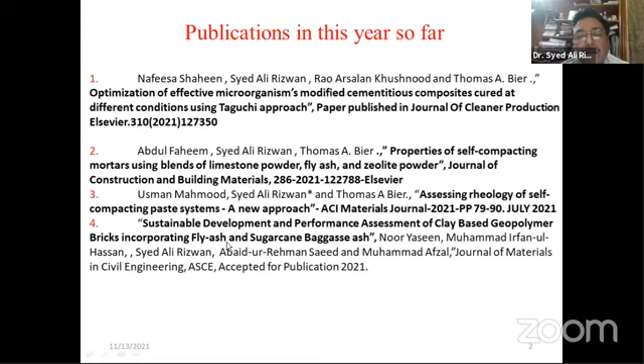And the 4th paper that is under publication stage is Sustainable Development and Performance Assessment of Clay-Based Geopolymer Bricks incorporating fly ash and sugarcane bagasse ash, because these are waste materials and we have to find their value-added use.

So what is a self-consolidating concrete? This is the task assigned to ACI 237, and I am a member of that. ACI 237 defines self-consolidating concrete as highly flowable, non-segregating concrete that can spread into place, fill the formwork, and encapsulate the reinforcement without any mechanical consolidation.

So from the definition, it should be clear: it is highly flowable, so in the fresh state it acts like a fluid, and the laws of fluid mechanics are available. Then in the transition, when the skeleton within the concrete forms, it is somewhat solid and somewhat fluid. And then after, in the hardening stage, it gets hardened and obeys the laws of solid mechanics.

As you can see, self-consolidating concrete does not require any mechanical vibration, which is normally done with conventional concrete. What are the applications? Self-consolidated concrete is generally applied in situations where either mechanical vibration is not possible or it is uneconomical. The situations include tunnels, long span modern bridges, rafts, columns of high-rise buildings, pre-stressed concrete structures, and transportation structures.

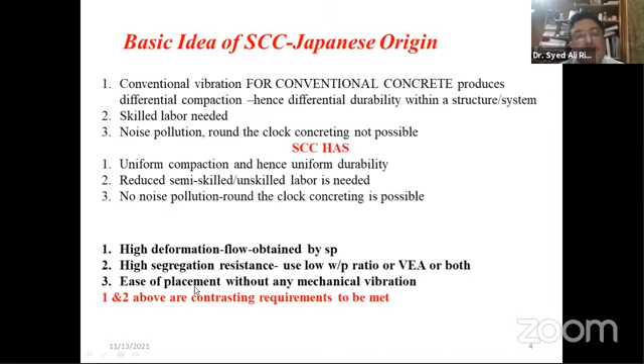Now, in Pakistan, what is the current practice? This should be the question, and this is the main idea of informing young engineers why self-consolidating concrete is not being applied. You must remember that first the architectural drawings are made, then structural drawings, and only if the specification states that the concrete used will be self-consolidating concrete is it bound for the contractor to use SCC.

At the moment, there are very limited structural engineers who specify SCC. Some may not know its advantages, or some may just ignore it because it has slightly higher cost, since we need mineral and chemical admixtures. Chemical admixtures are imported from abroad. Mineral admixtures like fly ash are now available in Pakistan due to thermal power plants. I hope chemical admixtures will also become available, and then we will be very good at making self-consolidating concrete.

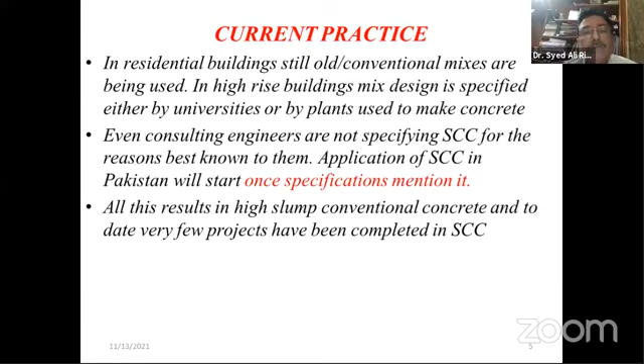In all concrete works, it is very important to calculate the water demand of concrete, whether it is conventional concrete or self-consolidating concrete, because if you know the water demand, your mixing water will be very close to it.

Now, you know that in concrete there is a powder phase. Any material less than 125 microns in size is called powder. So cement plus fly ash or silica fume or whatever are called powders. Their water demand can be determined simply by using a Vicat apparatus.

This is an experiment you do in your third year of civil engineering, calculation of water demand of cement. Then you can calculate the water demand of the fine and coarse aggregates. It is generally believed that the water demand of the paste system is around 92 to 93% of the total concrete, so you can multiply that by 1.07 or whatever to know the total water demand in kilograms per meter cube. So you can select an appropriate water cement ratio or water cementitious material ratio so that the water demand and the mixing water content are almost equal.

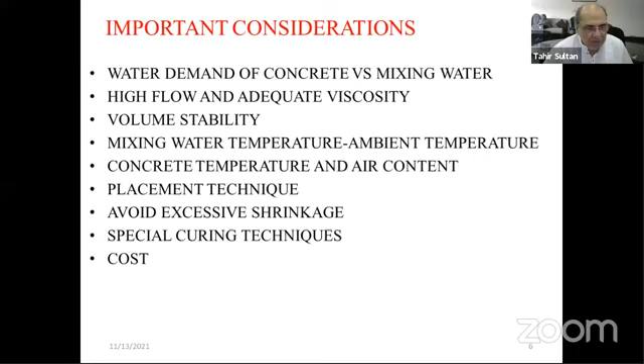One question has been asked late but it's related to vibration, from Ziaullah: he has seen in literature that a vibration of about 20 to 40 seconds is required for compaction. He's asking, will 20 to 40 seconds of vibration cause segregation?

20 to 40 seconds of vibration is too much; it should not be done. Segregation will take place only if the viscosity is low, but if the viscosity is high enough, segregation is not likely to take place. Ultimately, due to sedimentation, all the phases will occupy their positions. In conventional concrete systems, the mixing time in Germany is around 2 minutes, and for special concretes like SCC, we can have 3 to 3.5 minutes on the plant, where you can discharge all the chemical and mineral admixtures in the same drum, and there is a lot of shear rate.

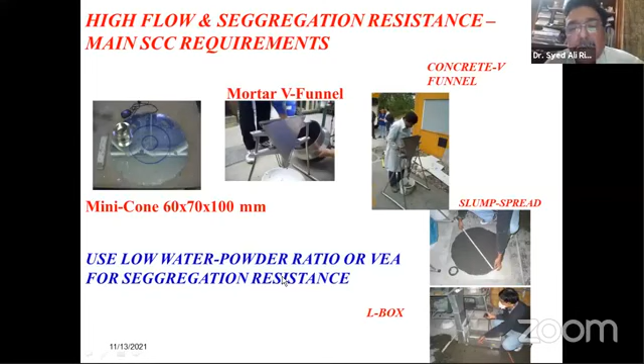Dr. Saab, please continue. There are no questions so far. Okay.

Now, as I have mentioned, in conventional concrete the Japanese think, and I endorse, that there is a differential compaction and hence differential durability. In SCC, we have got uniform compaction and hence uniform durability.

So this is environmentally friendly concrete, with no noise pollution. Binders, powders, sands, chemical and mineral admixtures are important. The only thing we should look for is that in case of coarse aggregates, the size and the content of coarse aggregate is slightly dropped.

Because when this SCC flows, there is internal friction between different phases. And if there is more internal friction, it will take more time to flow, and hence it will not be an SCC. Therefore, we choose a slightly low coarse aggregate content, and its size in actual practice can be limited to around 16 millimeters or so.

In the conventional concrete system, if you are doing residential buildings, these days engineers prefer to have a half-inch down concrete. But when I was a student at UET Lahore, our teachers like Professor Khilji and others used to tell us that the maximum coarse aggregate size should be as large as possible. Even they recommended 1 inch and 1.5 inch.

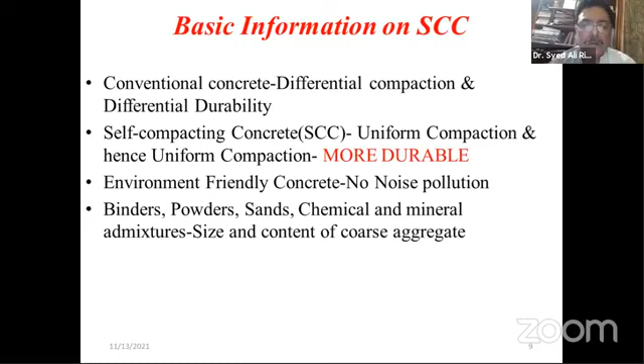Then I will try to show you some videos. I'm not sure why these...

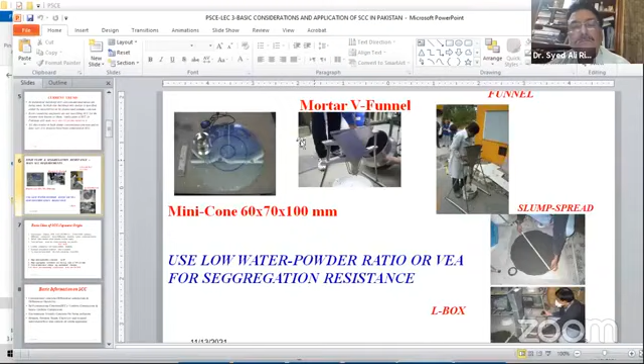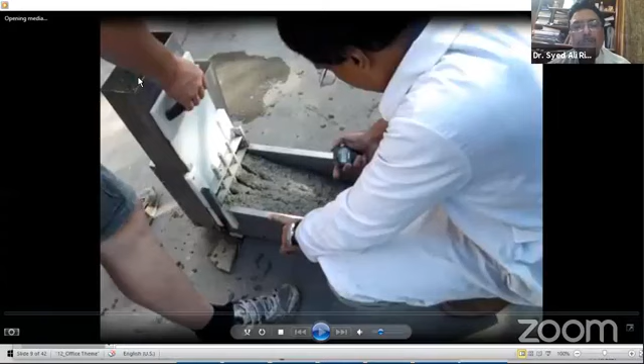This is the L box. You can see these reinforcements and concrete is flowing. So we determine the 20 centimeter, 40 centimeter, and 60 centimeter time.

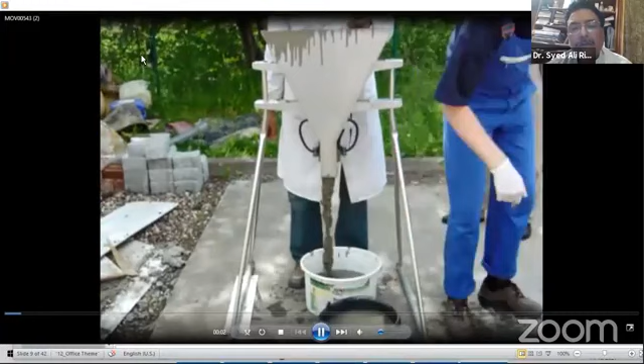And this is the V funnel test. You note down the time to empty the V funnel.

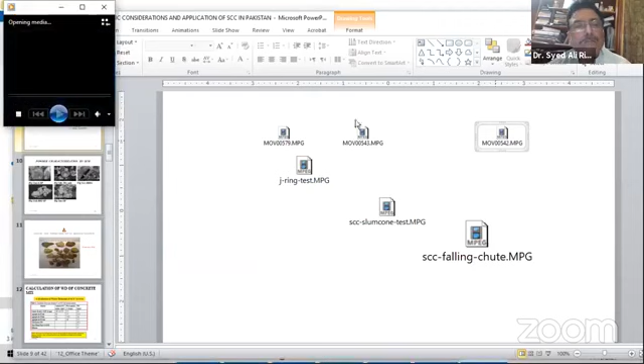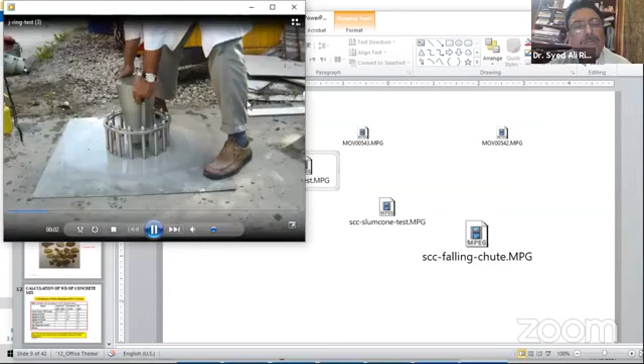Now this is the J-ring test. And these reinforcements simulate the obstruction to the flow.

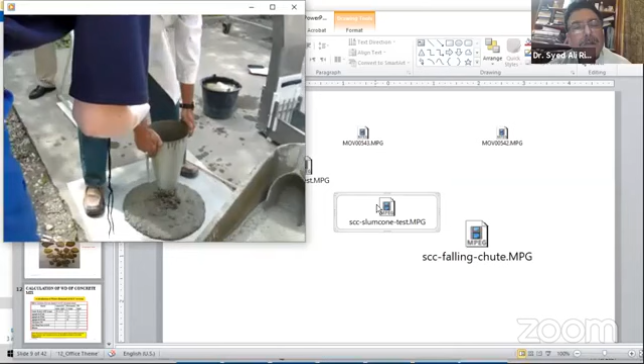Ordinary slump cone. Now all these will indicate that there was adequate viscosity. Otherwise, some coarse aggregate would have gone apart.

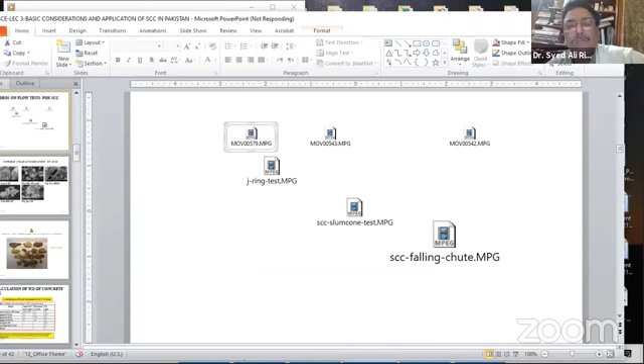Then in this picture, you can see some of the powders which can be used in Pakistan. In Pakistan, we have these crushers available near Margalla stone, and the dust of that is called limestone powder. I have labeled it as LSP. Then fly ash is also available due to these thermal power plants.

You can also use rice husk ash if it is amorphous, and you can also use silica fume as the powder. These are the mineral admixtures. They improve the microstructure of concrete.

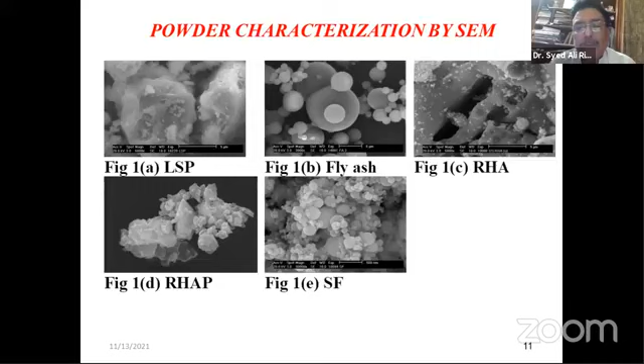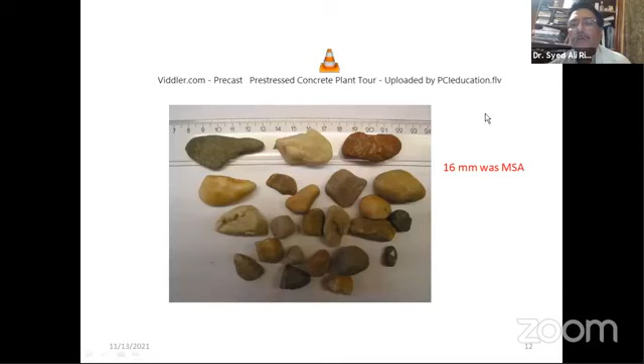Now, I wanted to show you that in pre-stressed concrete structures, you can use SCC.

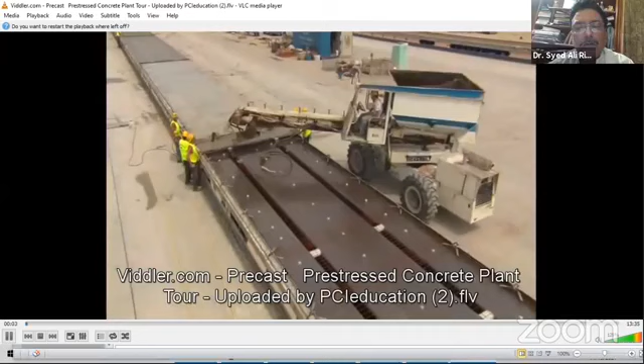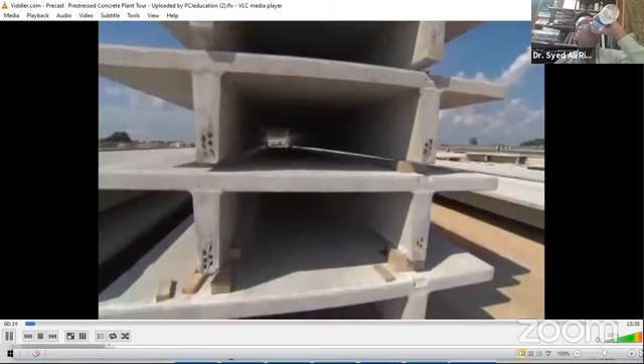This video will explain the entire process of using pre-stressed concrete in a pre-stressing plant. In this case, a double T. A double T is used primarily for parking structures, but can be used in virtually any type of building, including office buildings, industrial buildings, and schools, to name a few.

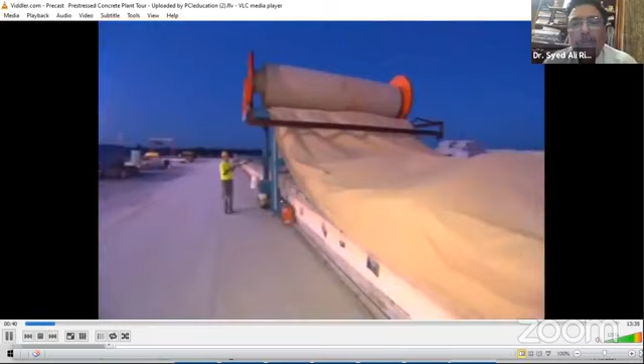For any pre-stressing plant, it is very important to maintain a clean site, not only from an image standpoint, but also from a safety standpoint, since any debris left over from the day before could create safety problems. The first part of the process is setting up the forms.

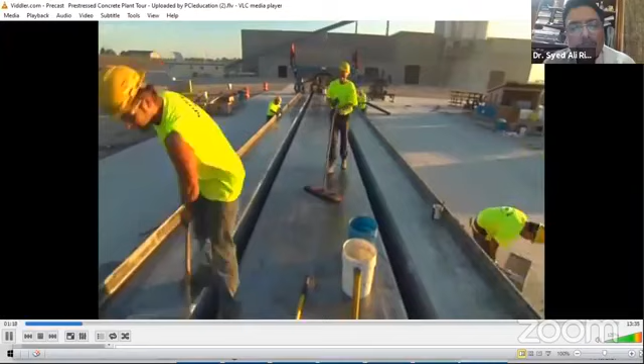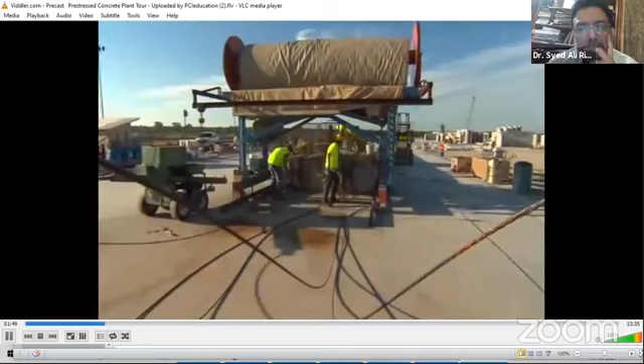This particular bed is set up for 5 double T's, each about 60 feet long. The bed has a total length of 400 feet. This is a self-stressing form, where the form itself is designed to take the total pre-stress force in compression, and also to handle the eccentricity of the strands.

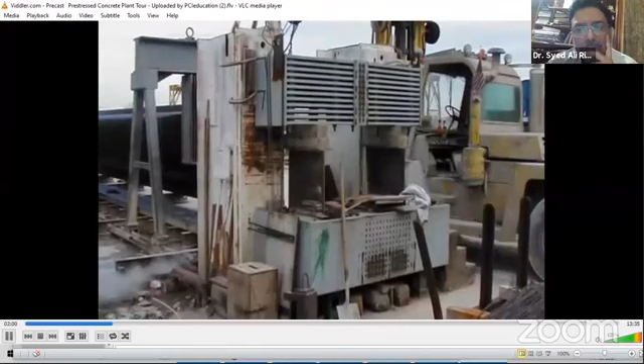Sometimes the producer makes a form that is set between both ends that are built right into the ground. The pre-stress force is then resisted entirely by both ends.

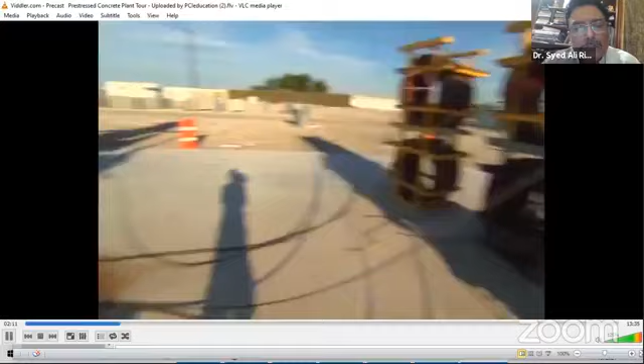Next, the strands are placed in the form and extended from end to end. They run through each of the dividers, and then through the stressing plates at each end. The typical spacing of the strands is approximately 2 inches.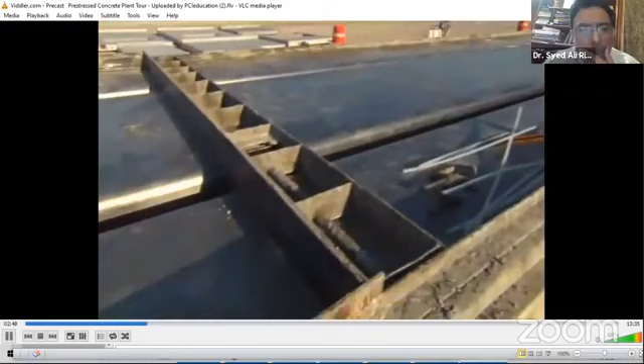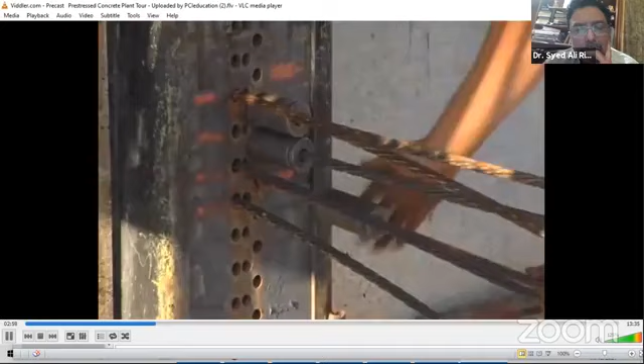The next step is the tensioning of the strands. In this case, we have straight strands, 6 strands at each stem, as shown here. The strands are first tensioned to about 2 to 5 kips based on the gauge pressure reading.

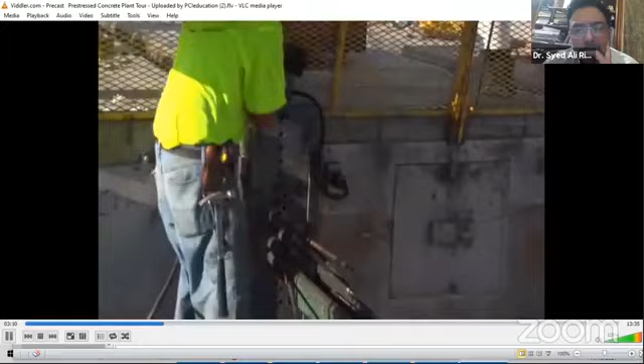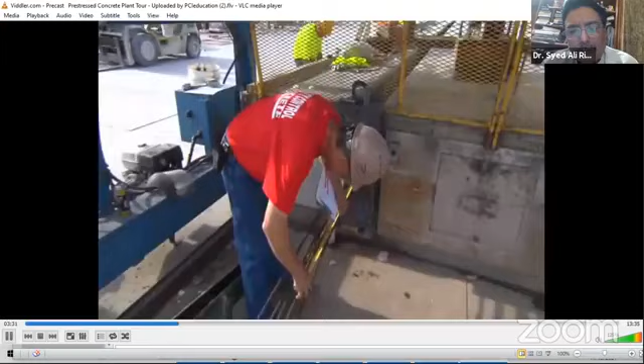A mark is made on the strand after the preload is applied. The strand is then tensioned to the specified level and measured using gauge pressure on the hydraulic pump. The QC technician then checks the elongation against the theoretical elongation. The requirement is that the force on the gauge and the elongation must match within 5%. If that tolerance is not achieved, the reason must be established and the strand may need detensioning and retensioning.

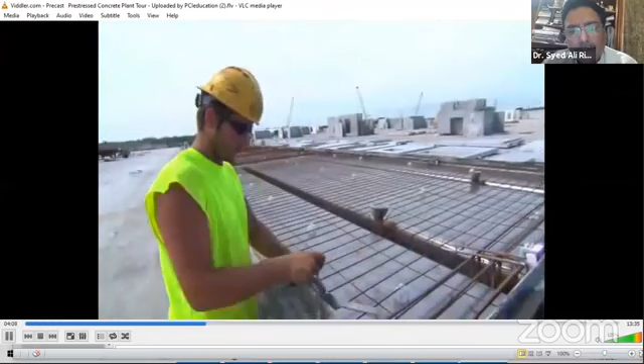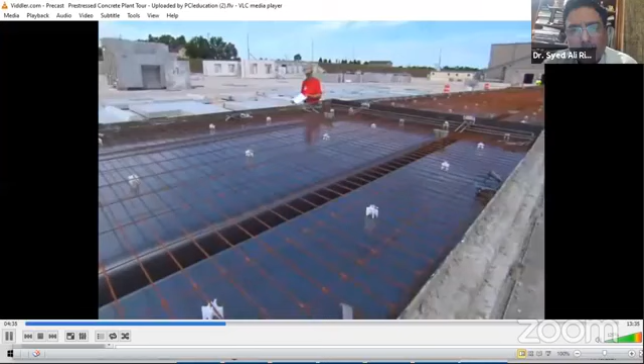The form is now ready to have concrete, but only after a pre-pour quality control check is made and the QC person signs it. This QC check can also be done by the bed superintendent, depending on the particular plant's practices. The check is critical to ensure and produce the highest quality.

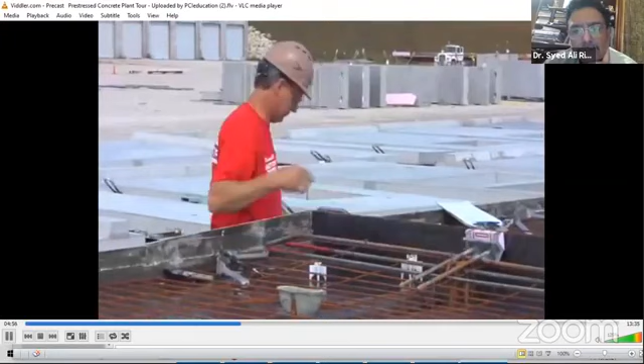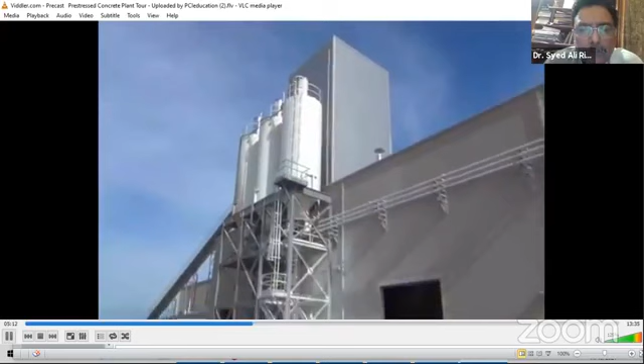Concrete is mixed in the batch plant under tightly controlled conditions. The cement is supplied using tanker trucks. Here the cement is flowed from the tanker through piping to the cement silo.

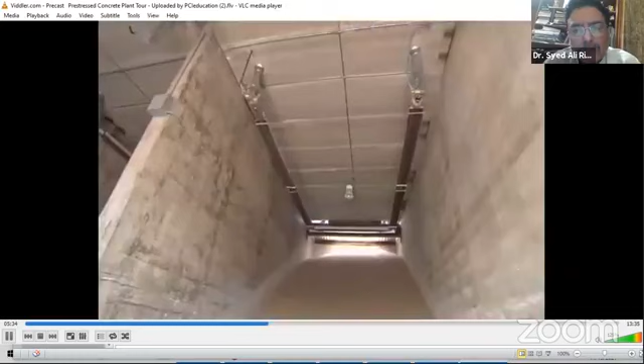When needed, aggregates are delivered to bins in the batch plant. The aggregates are stored outside of the batch plant in separate bins. In this case, an enclosed vertical bin system is utilized. During winter, in northern climates, the aggregates must be heated properly through the batching system to maintain proper concrete mix temperatures.

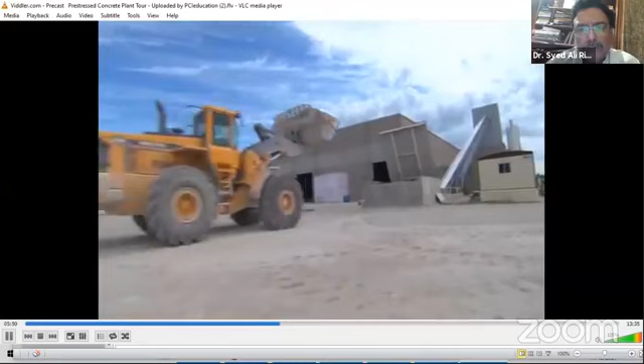Augers are used to move material and protect the flow. Computers are used to proportion the mix. Cement, sand, stone, water, and admixtures are measured according to signals from the computer.

After the concrete is discharged into a delivery device, it's imperative that the concrete mix be delivered to the form as soon as possible. These vehicles are called buckets, and they are used to deliver the concrete to the bed.

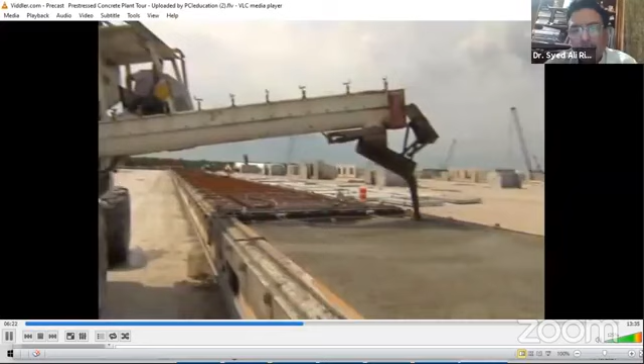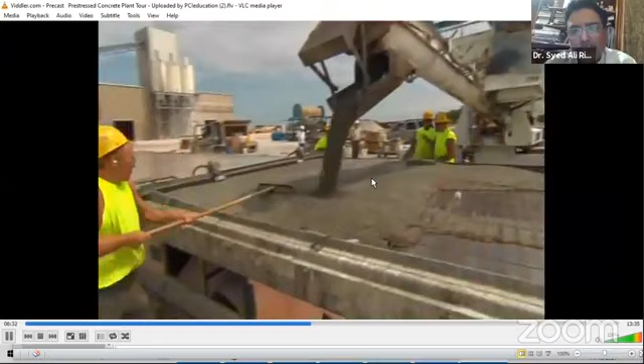A self-consolidating concrete is being used to cast these particular double T's. With this type of concrete, vibration is not required to consolidate the concrete. However, lightly controlled vibration is used in the double T stems to help it flow from the side.

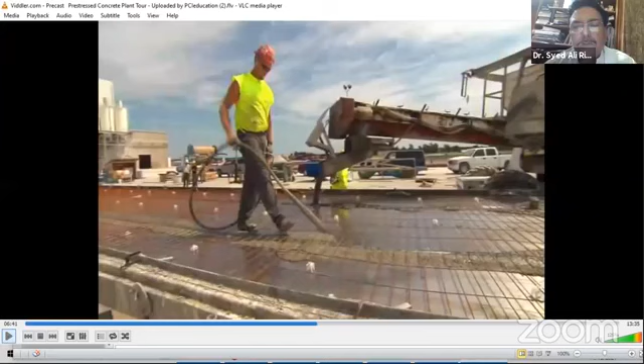So you have seen that the stem was slightly vibrated because in double T's it matters, but the vibration time was just a few seconds, not 20 or 40 seconds.

In the SCC plant, I had a chance to work in a team of professionals in Germany, where we had to make concreting at 150 meters down the ground surface, and the horizontal distance was also around 300 meters.

The pumper used was from Putzmeister, the best pumper in Germany. Natural aggregates were used, with a maximum size of 16 millimeters, but some aggregates went up to 5 centimeters long since they could pass through the minimum dimensions. If you get more of these particles, the chances of blockage are quite high. So you should be careful about the paste content, because paste is the vehicle for transport of the aggregate phase. You have to examine the shape and size of the coarse aggregate.

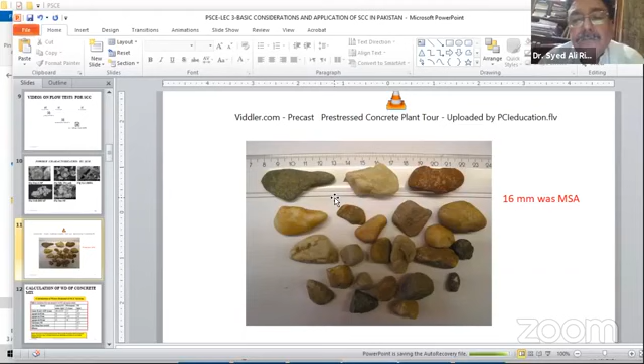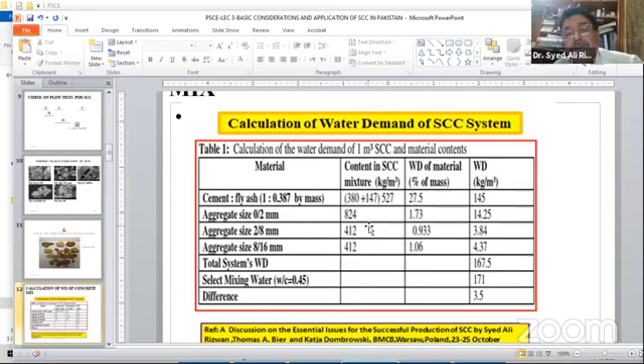You can get your questions noted if there is a question on this slide. This paper was published in BMC8 Warsaw, Poland, on page 152. The reference is given.

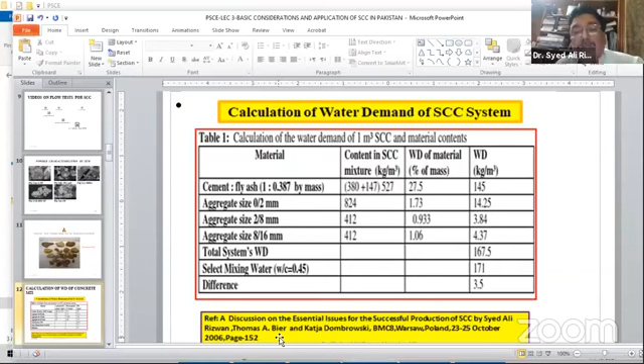Then this is a very beautiful slide, which gives the packing concepts in high performance concrete or self-consolidating concrete systems. This has been taken from a journal, probably by Professor H.J.H. Brouwer from Eindhoven University of Technology. You see on this there is the void fraction - if it is 0.4, you can call it 40%. And here is the percentage of coarse sand to coarse aggregate.

Inside the void, there can be either air or water. In a modern concrete system, we want to pack the concrete system as far as possible. That is why we are having problems like shrinkage and other things. These were not problems with lean concretes because they had very high void ratios and very high internal cushions. So if modern concretes are used, they give some advantages, but you should be well aware that you can be in trouble if you do not know how to handle them properly.

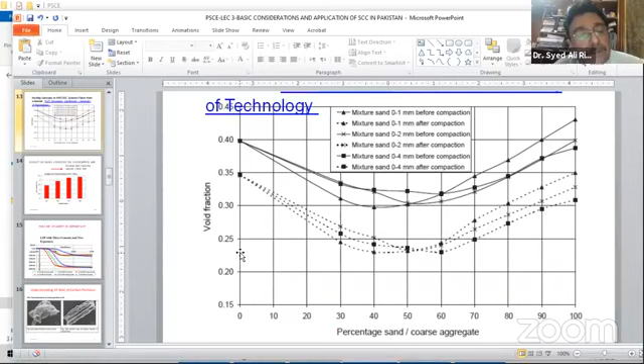I think more work can be done to improve these using our Pakistani sands and coarse aggregates, because after the construction of dams, according to the Indus Basin Treaty, the water coming downstream is actually sediment free or has very low or light sediment size. The result is that the fineness modulus of sand has been dropping over the years. Now the highest fineness modulus of sand is from River Haro at site Kibla Bandi, which has a fineness modulus of around 2.2. But we all know that in order to make high strength concrete, we need sand with a fineness modulus of around 3. So we need to mix in coarser fractions in order to make high strength SCC or high strength conventional concrete. If you have any question, please get it noted with Tahir Sultan.

Then in this slide, which looks very beautiful, on the vertical axis there is the air content.

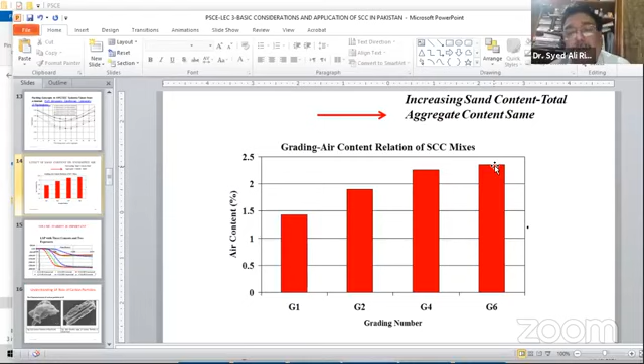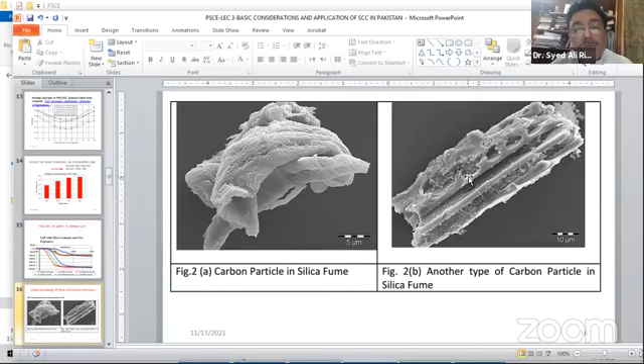Next slide: I was testing a self-consolidating mortar, and this is the aggregate under scanning electron microscopy, magnified 300 times. This is the matrix, and you can see a very well-defined ITZ—the zone which separates the aggregate from the cement paste.

These days we are busy making arrangements on how to make this ITZ very strong, because it is the weakest link in reinforced concrete structures. That's why we use a lower size aggregate, to keep this ITZ as small as possible. There are other ways also.

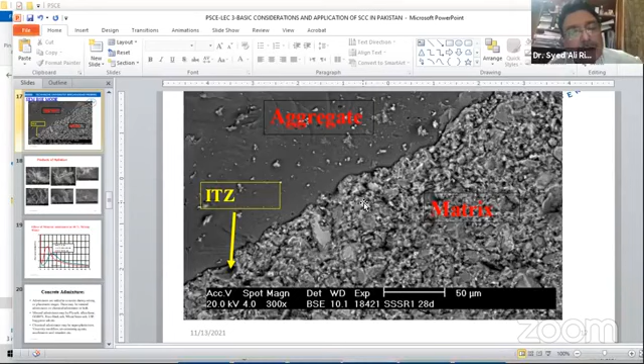All civil engineers know these are the hydration products—very well defined, hexagonal, beautiful calcium hydroxide crystals, and these are the ettringites. The shape, morphology, and sizes change due to some constituents. We study the microstructure, assuming that the properties at the microstructure level will explain the results at the macro level.

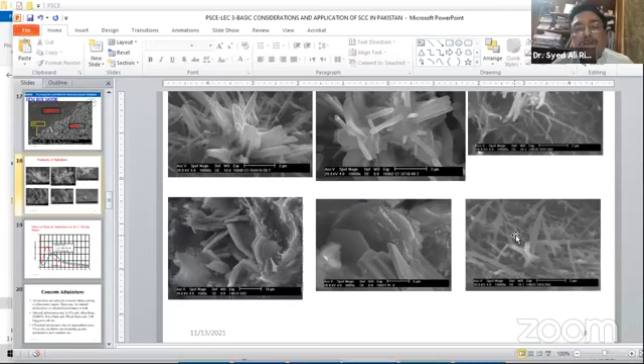Now this is the calorimetry curve, in which I have just tried to use...

The first question is again from Engineer Haziq Zahir: are there any detrimental effects of using silica fume? Literature usually suggests using 10% of the quantity of cement in the mix. The second related question: what about heat of hydration relatable to SCC? Also, when we use pozzolanic cementitious materials with SCC, do they act as retarders too, since there seems to be a delay in setting time?

Silica fume is a kind of accelerator. If you see the present investigation, you will find Haziq is right. According to my experience and testing, the maximum quantity of silica fume, rice husk ash, or fly ash that should be substituted for cement is around 10 to 15%. For silica fume, 10% seems to be a reasonably good value. So all pozzolanic materials are in fact accelerators—they increase the heat of hydration and the rate of hydration reaction.

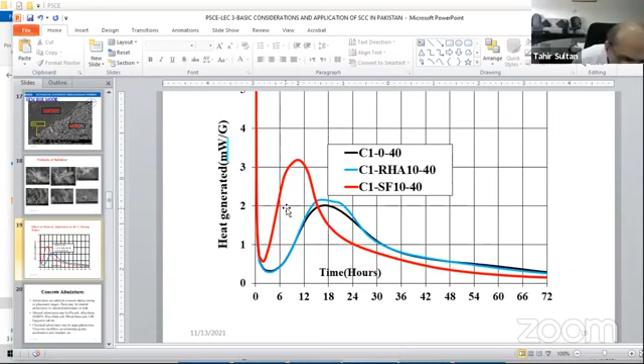Admixtures are added to concrete during mixing or placement. These may be mineral admixtures or chemical admixtures, or we use both. Mineral admixtures may be fly ash, silica fume, ground granulated blast furnace slag, rice husk ash, wheat straw ash, limestone powder, and bagasse ash. If you go through this list, I think we can use some of them.

I have supervised MSc theses on all these supplementary cementitious materials, and now I plan to write a book on the local supplementary cementitious materials which can be used in high strength, high quality concrete.

Then chemical admixtures can be superplasticizers, viscosity modifiers, air entraining agents, accelerators, retarders, etc.

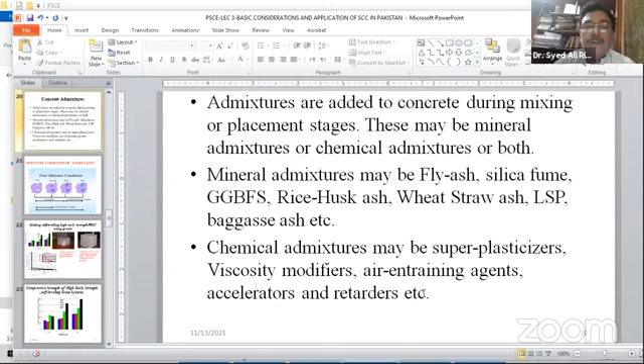He is asking, sir, when we use these pozzolanic materials, initial or early strength is high, but later ultimate strength is less than other. Not necessarily. When the first peak comes, he is right that the later strength may be slightly less, but he's referring to this graph showing initially high early strength. That doesn't mean that after 72 hours this pozzolanic material will die out. Silica fume will produce a third peak, and that will be higher than that. So this will continue.

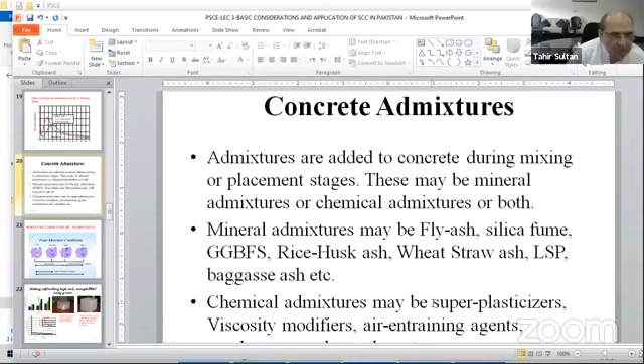Oven dry coarse aggregates will take water from the mix to complete its dryness. Even air dry aggregate will also suck in some of the water from the mix. If you use coarse aggregates in SSD condition, they will not contribute any water to the mix, nor require any water from the mix. In wet conditions, the aggregates will give away some water to the mix. So we should be very particular - if the aggregate is wet, there is a method to approximately calculate how much is the wet water, or how much more water there is than SSD conditions, so you can reduce that much mixing water.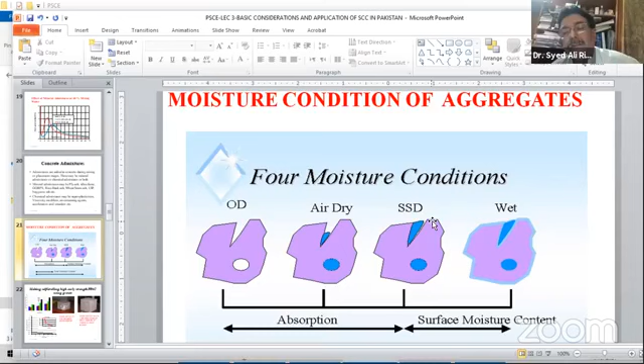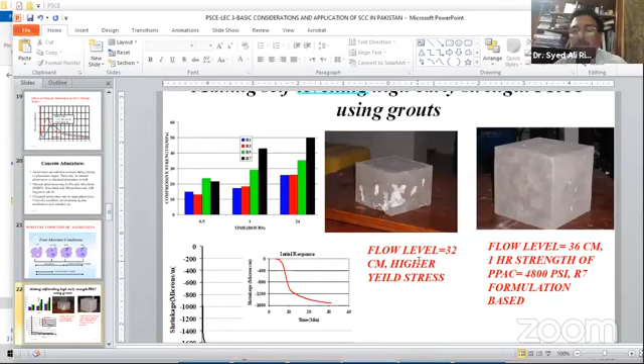I was also interested in making very high early strength cementitious materials. For example, if there's a motorway with some damage, we cannot close it for 28 days. So we should devise a technique to restore traffic as soon as possible. In this case, I tried to restore traffic in 30 minutes, achieving a strength of 4,800 psi in about 1 hour, which gave a complete bond with the rest of the damaged structure and a very nice finish.

Self-leveling grout systems can be used to make these kinds of repairs. But there's one thing: initially they give a lot of shrinkage. So in the recipe, you should have something that acts against shrinkage. You can use something which encourages the growth of ettringite or calcium hydroxide, or use chemical admixtures for arresting or compensating the shrinkage. So it's possible to repair these strategic structures in a very low time, according to the client's requirements.

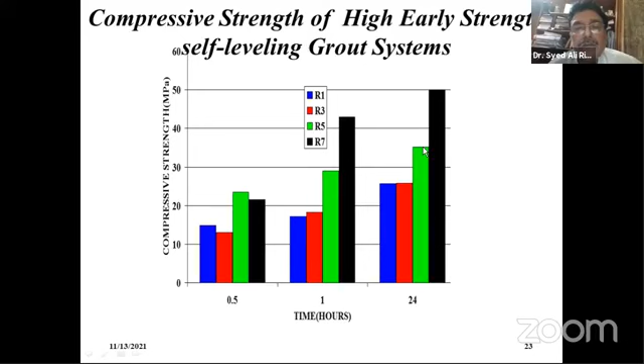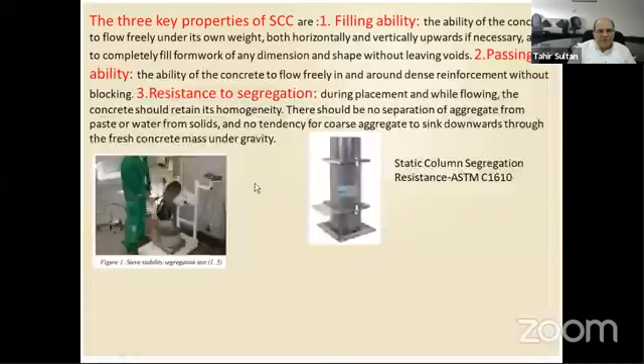Resistance to segregation can be determined by sieve stability segregation test apparatus, or a static column segregation test. In that static column, you make a column of a given height, fill it with the SCC, then after 24 hours or 2-3 days you remove it. You compare length and weight, then cut it into 3 pieces. If the density of all 3 pieces is the same, it means the coarse aggregates are evenly distributed at the top and bottom, and there is no segregation.

This is a very simple, visually acceptable test. You can see that coarse aggregates are available at the top as well as at the bottom. To confirm it, divide it into 3 portions, weigh the 3 portions, and if the weights are the same, it means there is no segregation.

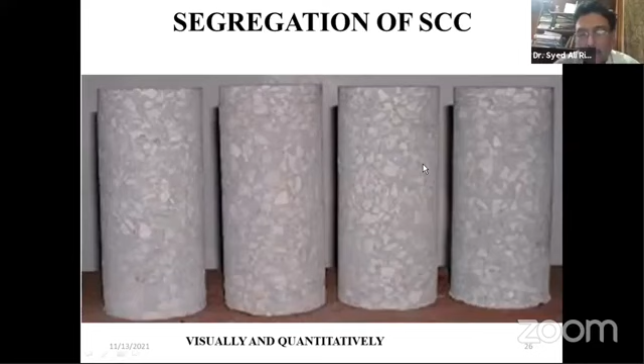There are some slump loss cases which can be due to cement-superplasticizer incompatibility. If you are using more than one chemical admixture, it's advisable that you use all chemical admixtures from one company. If you use a superplasticizer from one company, an air entraining agent from another, and an accelerator from another, you will end up with incompatibility issues and spoil the placement.

You can also have an increase of zeta potential of the C3S phase. So why are we concerned with 28-day FC prime? Because cement clinker generally has 4 phases: C3S, C2S, C3A, and C4AF. Only the hydration kinetics of C3S have been fully understood, and it's believed that whatever strength C3S achieves at 28 days will be the strength of mortar or concrete. So we base our calculations on the strength achieved by the C3S phase. C3A can do other things like imparting alkalinity. If C3A is more than 10%, maintenance of slump can be a problem, and higher C3A can also cause higher shrinkage.

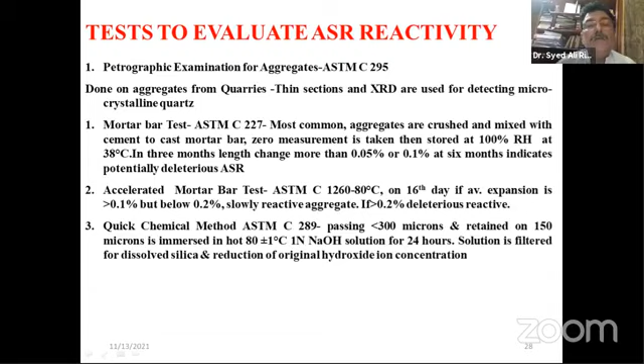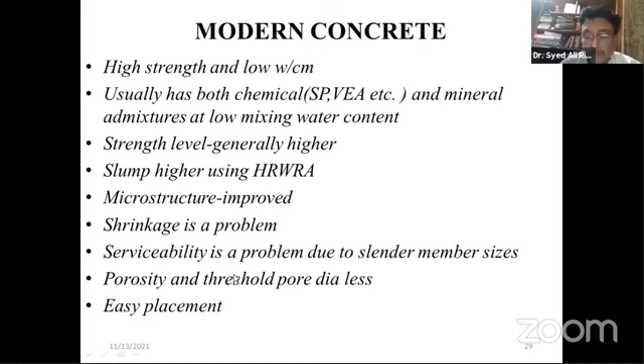If you test a high strength concrete cylinder, it should explode like a cartridge in a shotgun. In a displacement controlled machine, you can also listen to the internal cracking. You will notice internal phases crack while there is no crack on the external surface. But when they explode, they explode very, very strongly.

I think we have done that.

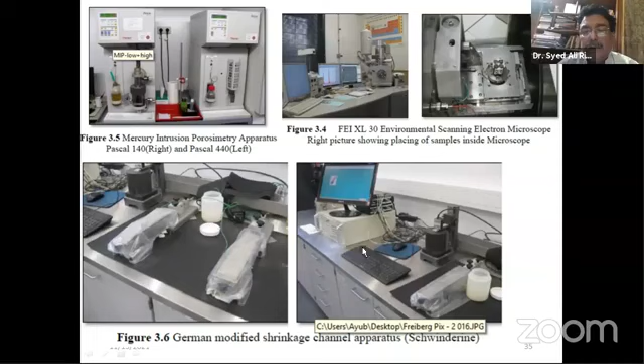These are some machines which are used. This is the mercury intrusion porosimetry. This is the scanning electron microscope, which I used in Germany. These are the places where you can hold samples. This is the software used to determine the shrinkage of a cementitious material placed inside these samples. These are the covered samples.

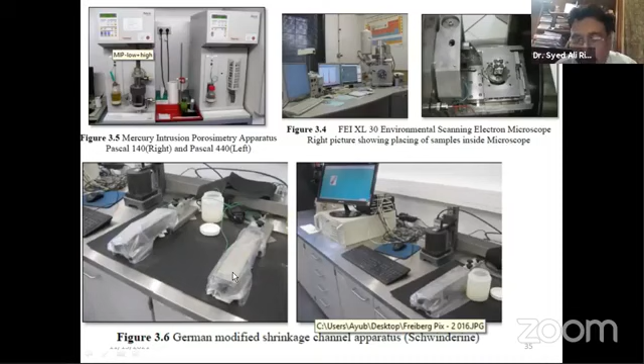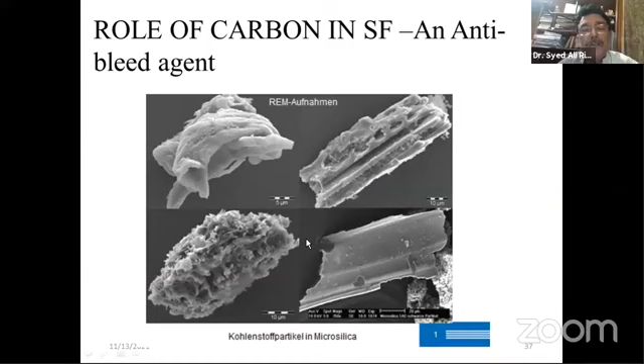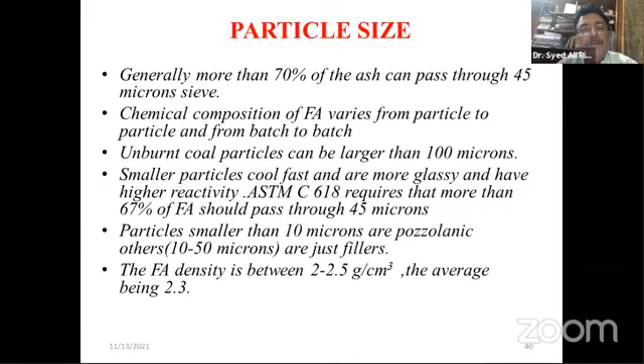In my opinion, everything is possible in modern concrete systems if the user is well aware of all the positive and negative points of all the constituents and aggregates.